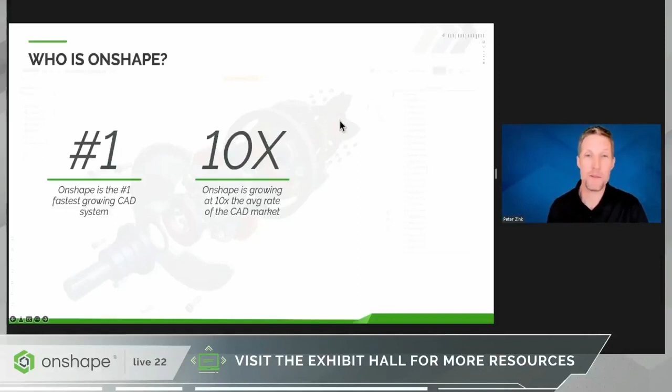Even if you're an avid Onshape fan, you might not know that Onshape is the #1 fastest growing system in the CAD market. It's being adopted 10 times faster than the average CAD tool, and there are over 2 million Onshape users today, and there are thousands more every week.

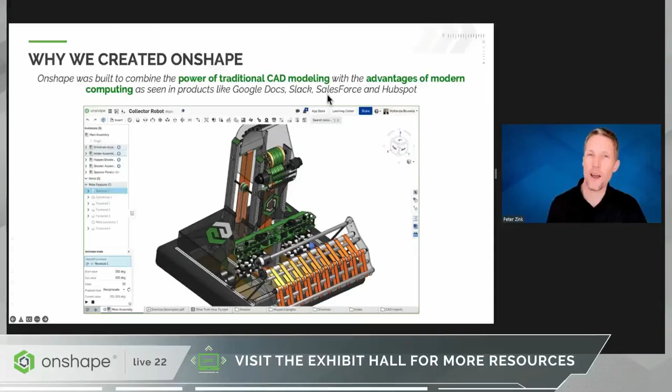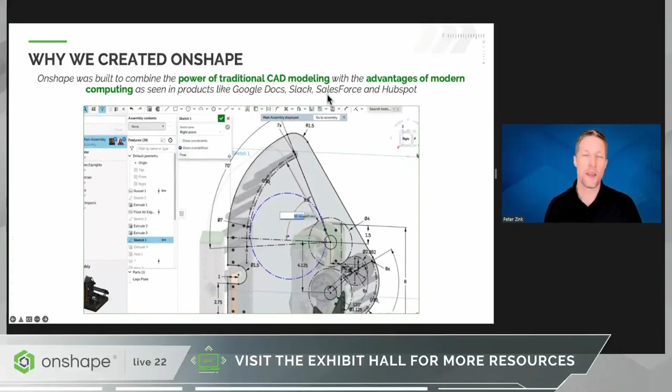Whether or not you've used Onshape before, it's important to understand that it's fundamentally different from any other CAD software. Onshape is a true cloud-native platform, and like Google Docs and other cloud-native platforms, this enables real-time collaboration and cloud sharing, all on a cutting-edge professional CAD modeling platform. We see this combination of technologies as game-changing for the future of STEM education.

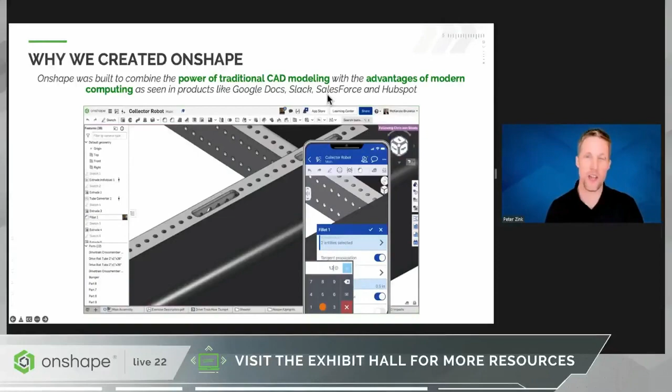The best part about Onshape, and the reason I started using it when I was teaching, is that it's free for students and educators at both the K-12 and university level. It only takes seconds to create a free EDU account at onshape.com/edu, and you get started modeling right away on any device. Because it's cloud native, it runs in the browser. There's nothing to download or install, and no licensing required.

Beyond the free plan, there's also an enterprise plan for larger implementations. The enterprise plan includes features such as single sign-on and privacy and security management, as well as data analytics that allow teachers to see exactly what students are working on, who they're working with, and how long they've been working. Educators can go to onshape.com/educators to learn more about the enterprise plan and to reach out to our customer success team to learn more.

Now I'll talk about some of the Onshape education enhancements from 2021. Most of these updates originate from feedback we received from students and teachers. Incidentally, there were 17 Onshape updates in 2021, about one every 3 weeks. And these updates are seamless. They happen for every user automatically. You never need to call your IT department or anyone else to update Onshape. Every user is always on the latest version.

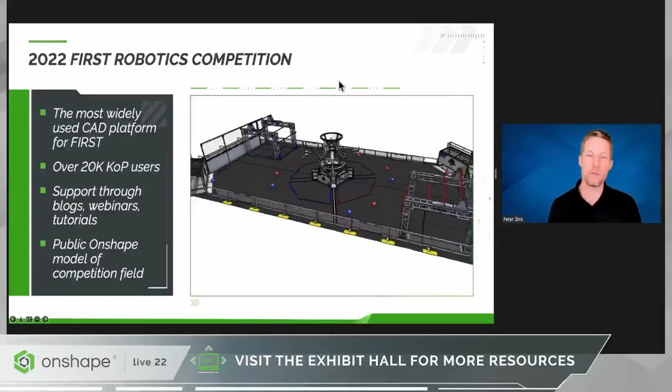This year, we also formed a new partnership with Science Olympiad as the official sponsor of their Write It, CAD It event. In this clever design communication challenge, one student was given an image of an assembly, while another student was given a set of CAD parts. The first student wrote instructions for the second, who then had 20 minutes to assemble the CAD parts using only those written instructions. Our team created webinars, tutorials, and practice models to help participants learn about CAD and be successful with this fun and educational event.

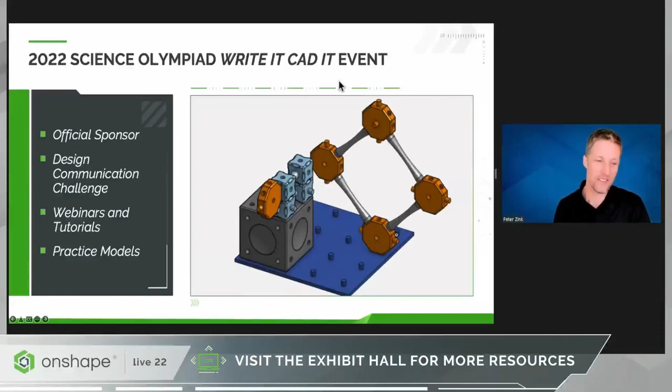We are also excited to share that we recently partnered with the REC Foundation to host a virtual VEX robotics competition. This virtual competition will kick off on March 21st and run through April 29th, and is open to students across the globe at any grade level. Throughout the event, we will be sharing webinars, tutorials, and parts libraries to ensure that each team is set up for success. A link to more information can be shared in the chat.

Over the course of 2021, several partner apps were released in Onshape. If you're not already familiar with the Onshape App Store, it's a central repository of apps created by Onshape partners, which enable engineering tasks that go beyond the typical CAD design and documentation where Onshape really shines. If you need advanced simulation, subtractive manufacturing, advanced PLM, or just about any other solution, this should be the first place you go. We are very excited to share a few applications that have been particularly useful for the Onshape education community.

Onscale Solve is a cloud engineering simulation platform that combines massively scalable multiphysics and cloud supercomputing to enable easy-to-use workflows for advanced CAD-based simulation. A SaaS business model with simple pay-as-you-go pricing for simulation enables easy Onshape integration for you and your students.

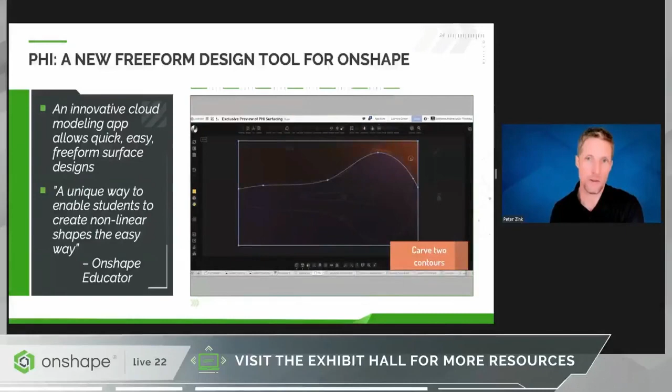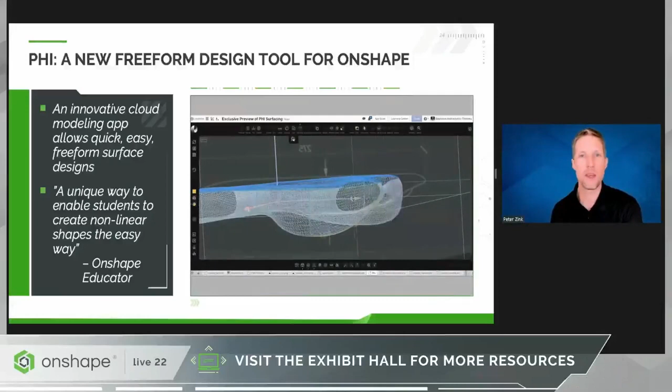Next, Phi is a new type of surface modeler for Onshape users that allows quick and easy interactive modeling of surfaces without sacrificing precision and quality. Phi is quickly becoming the tool of choice for Onshape users in need of advanced surfacing techniques. Based on direct modeling concepts, Phi allows users to manipulate basic primitives to easily create organic designs. A link where you can register for education will be shared in the chat.

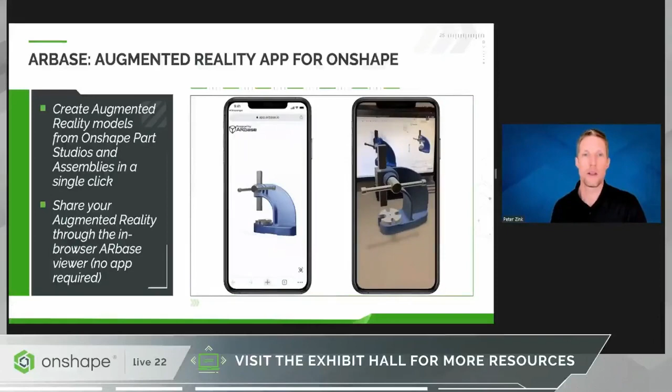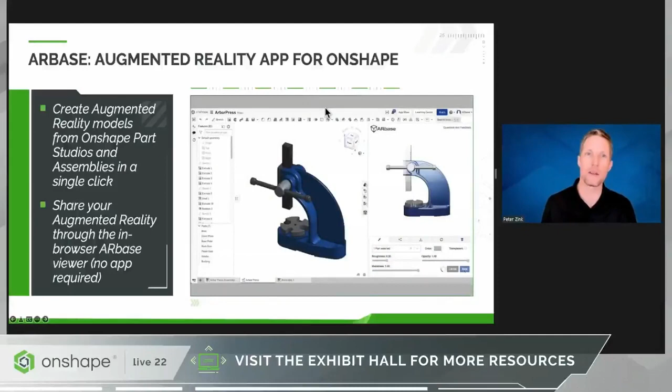With AR Base, you can unlock the power of augmented reality in your CAD workflow. AR Base allows users to instantly create, edit, and share augmented reality models from Onshape part studios and assemblies. The app provides a unique link and QR code for each model, making it easy to share and view your models on a mobile device through the AR Base in-browser augmented reality viewer. This means that friends and teammates can see a digital version of your model in the real world, using their smartphone in just seconds. It's easy and fun and a great way to do virtual testing of design ideas.

Lastly, the MKCAD library app was developed by members of the FIRST Robotics Competition community. It adds hundreds of parts that teams frequently use for their robots, including wheels, sensors, bearings, motors, gearboxes, and more. As one reviewer said, this app makes it 100 times easier to develop robots in Onshape.

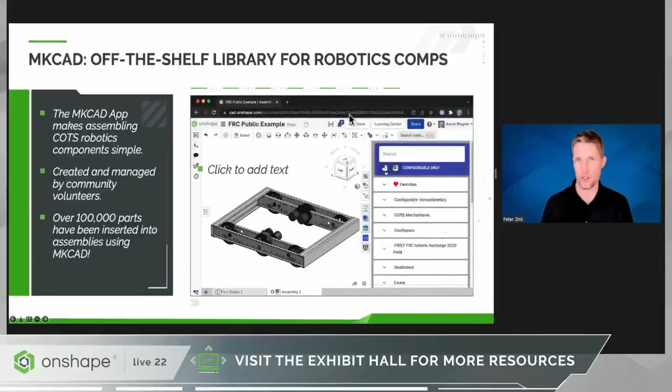Finally, I'm excited to share a small sneak peek of a couple new items that the Onshape development team is working on. To be clear, we can't make any promises as to when these features may be available to the education community. Onshape employs an agile product development process, which means some improvements occur every 3 weeks, but others may happen later as we continue rigorously testing updates to ensure they work seamlessly and provide you and your students the opportunity to focus on learning instead of struggling with software that may not quite work. It's critically important to us that everyone has a positive and productive experience with Onshape every day.

PCB Studio in Onshape will enable students to assemble printed circuit boards along with their mechanical designs. This feature will enable electrical mechanical design collaboration natively within Onshape. Though it's not a PCB authoring or editing environment, students will be able to seamlessly go back and forth between any ECAD system and their mechanical design in Onshape to ensure everything will fit and work together. If you're interested in learning more, there's a session happening right now called Onshape Extensions, PCB Studio and Frames, and you can watch the recording, which will be available after this event concludes.

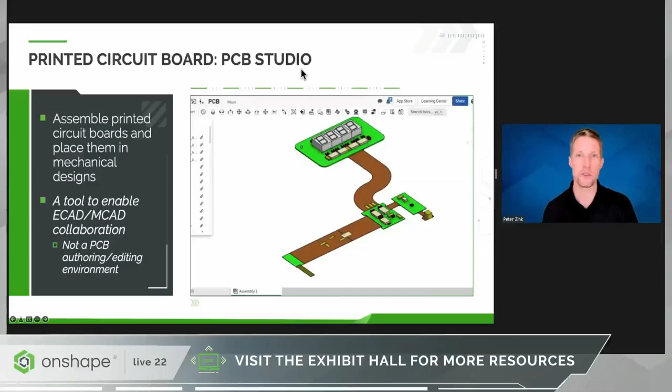As a result of feedback and input from dozens of educators, we're developing classes and assignments functionality for the Education Enterprise Edition to give educators a way to easily group students into classes, make documents available to those classes, assign work, and track submissions and work by individual students. We'll make sure this complements existing LMS systems so it doesn't create more work for educators, but just helps organize classes and assignments in Onshape more easily. We can't promise when these are coming, but our hope is to share these new features with the Onshape education community soon.